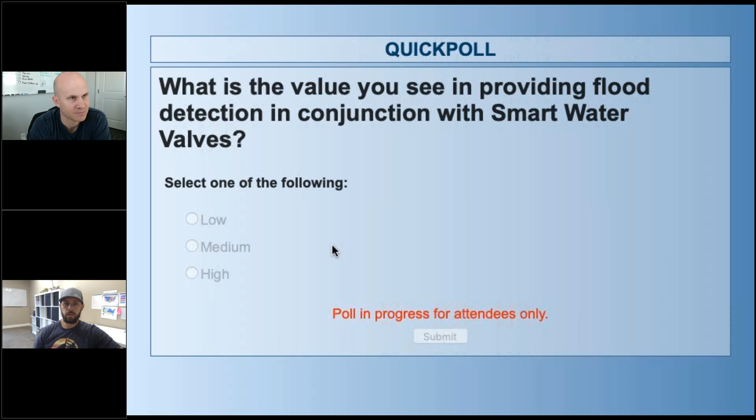Yeah, thank you, Neil, really appreciate it. Those were awesome polls, excited to see those numbers and get a little bit better insight into your business. So we are very excited today to talk about the new IQ water valve. This is a brand new product that's coming to market here this month. We'll talk a little bit about launch planning at the end of the webinar, but we wanted to give you a sneak peek into the product today, talk about what it is, how it's different, and then go through the installation process as well as some best practices. So we'll try to be quick. Again, today, these are really designed to be 20, maybe 30-minute webinars at most, kind of bite-size bits that you can take in and learn about the products without devoting too much of your day.

So with that, we're going to jump right into the IQ water valve. So what is it? It's quite a bit different than a lot of the water valves you may be used to in the market today.

A lot of the water valves that you see out there today require a plumber, and they're very expensive. That's been cost prohibitive, right? They're $300, $400, sometimes even $500 for the valve. You have to cut the pipe to install it and hire a plumber to do that.

That's another several hundred up to $500. And so I would say the typical smart water valve install in our market today has been right around the $1,000 mark, and that's been a real barrier to entry into the smart water market. So one of the things we've tried to do specifically with this product is to bring that barrier down. We want to drive up the adoption and the ease of install and lower the cost here. And I think we've done that. So we're very excited about it.

So this is retrofit, no plumber needed. It literally installs in 2 minutes, maybe less. You're gonna get to see that here in a little bit. We'll actually install one here on a pipe. It's retrofit, designed to fit quarter turn ball valves. So that's anything, if you can see my camera, anything like this, just a simple quarter turn valve, which is the majority of the valves on the market today, be it newer homes or even some older homes as well. It doesn't work on gate valves. So if it's really old, it's got the actual spinner gate valve, kind of like a hose bib or something like that, that's not going to work. But a lot of different types of ball valves, different sizes, are going to work with this product. We're going to show you that today on a couple different pipes and products, different types of valves.

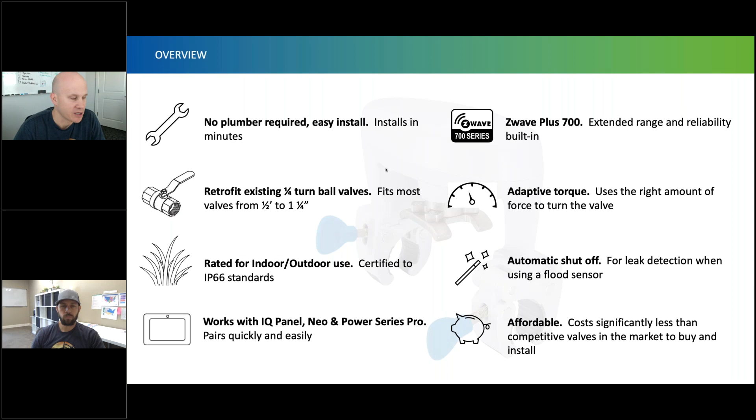It's just about knowing your customer, knowing that house—are you going to need a little bit more range? If it's a smaller home, then you probably just get away with the S-Line. If it's a larger home, if you're getting into maybe even some commercial situations where you did want to install this, or a bigger warehouse, barn, or outbuildings, you'd want to use that Power G one for sure.

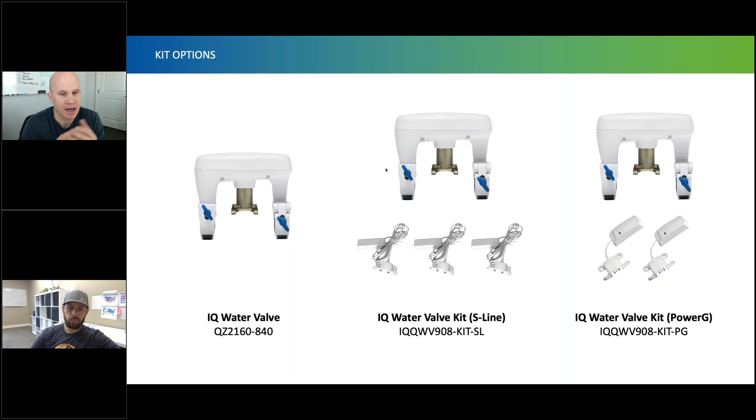I appreciate that, Mark. And the other thing I'll say about these kit prices is we're highly incenting the kit price here. So the difference between the standalone water valve and the kit price is really aggressive. You'll find the net cost of these flood sensors ends up being really attractive versus buying them a la carte. That's because we really want to incentivize the use of a flood sensor so you build that value, get that extra value in the automation where they're paired together, and get some of that automation beyond just a smart on-off valve. So we're excited about being able to offer those at the same price.

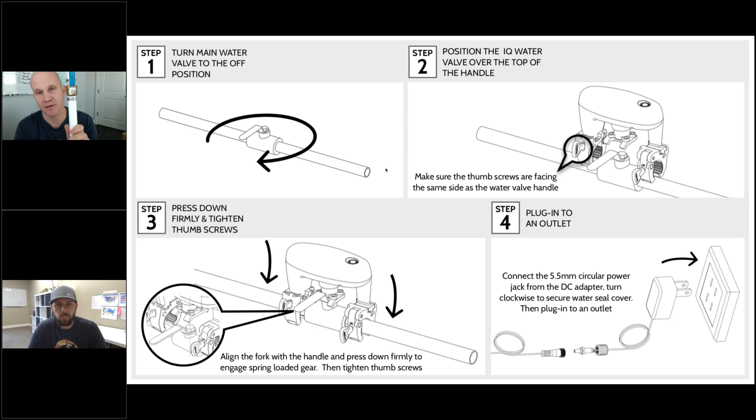The very first thing you're going to do is super easy. You're just going to go ahead and turn the valve. You want to install this when it's in the off position. The second thing is you're going to open up your thumb screws a little bit here, and you're going to install this directly over the valve with the thumb screws pointing the same direction as the valve. So you don't want it like this, that'd be backwards. You want the actual thumb screws pointing the same direction as the valve.

Now, when you push this onto the pipe, you can see this metal fork, we call it, has some adjustability, and inside here it's got gears that catch on the gears. So you want to make sure when you install this, you push it all the way in to where it catches on the gear. I've got a little spacer that we're including. If it's a really low profile valve, this one's kind of right on the edge. If it's a lower profile valve, you'll be able to put this spacer on the handle and go ahead, and when you push this down, that helps make sure the fork is engaged on low profile valves. So all you do is put it on.

Tighten your thumb screws here. Hopefully you guys can see that. And it's now mounted to the valve, ready to go. So that's step 1, 2, 3: turn off, stick it on, tighten your thumb screws.

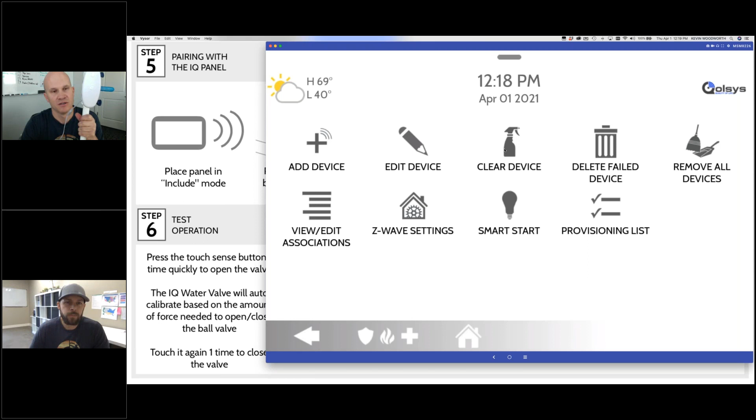Normally, being a Z-Wave device, I would clear it first. In this case, I've already done that in prep for this call. So I'm just going to go straight to add device, and I'm going to touch include on the panel. Now on the device, you just press this touch sense button 3 times. And there we see it shows up. It's S2 authenticated here, so let's go ahead and touch OK.

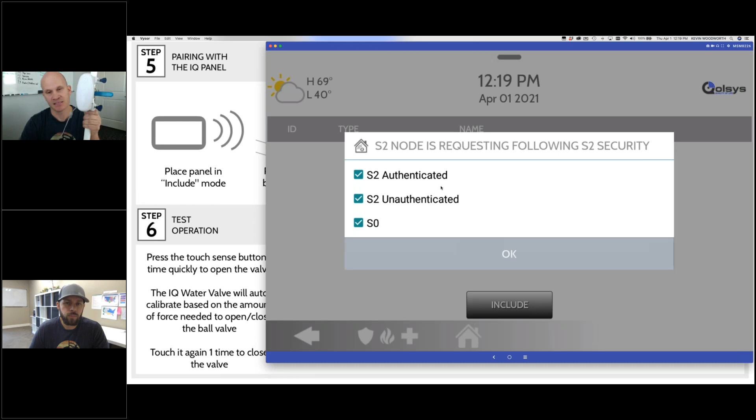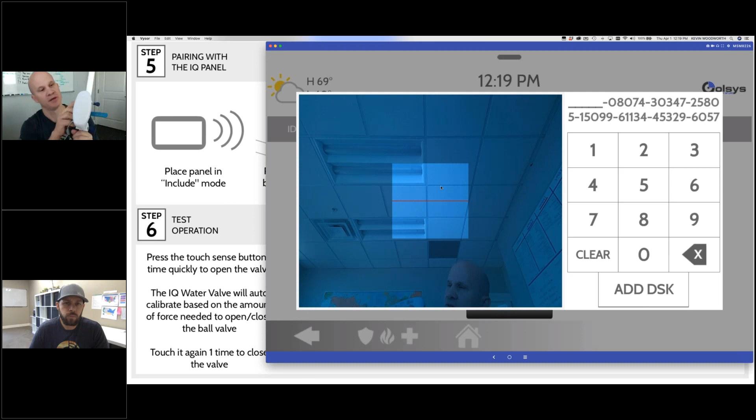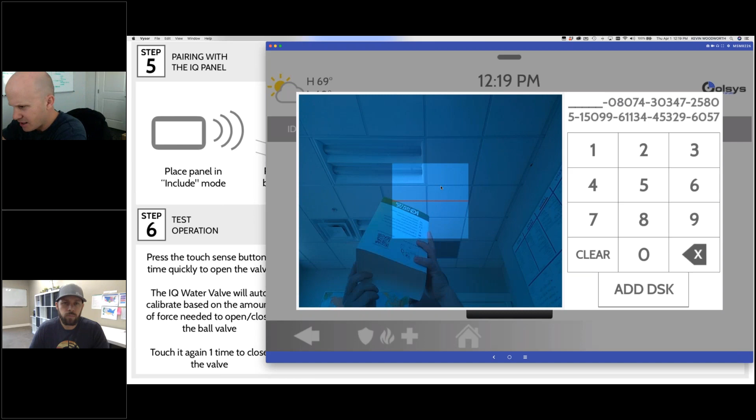And it's going to ask us for the DSK. Now, you can do this one of two ways. You can actually scan the QR code on the side of the water valve. It's a little bit small for the camera to read. You could take a picture of it and blow it up. We also list the DSK on the side here. Or you can take the sleeve of the box and scan the DSK there. So let's go ahead and do that directly into the panel.

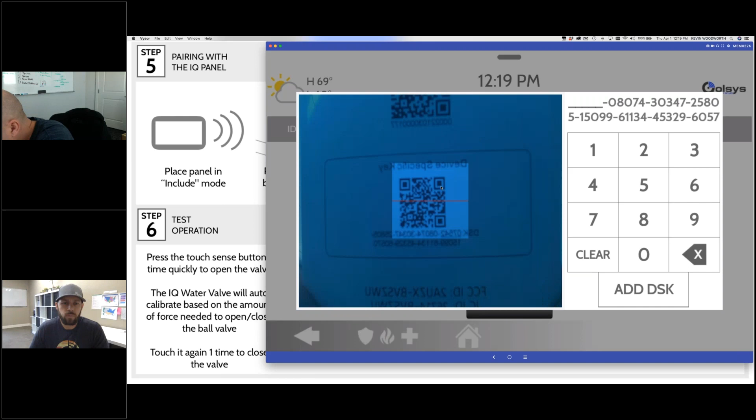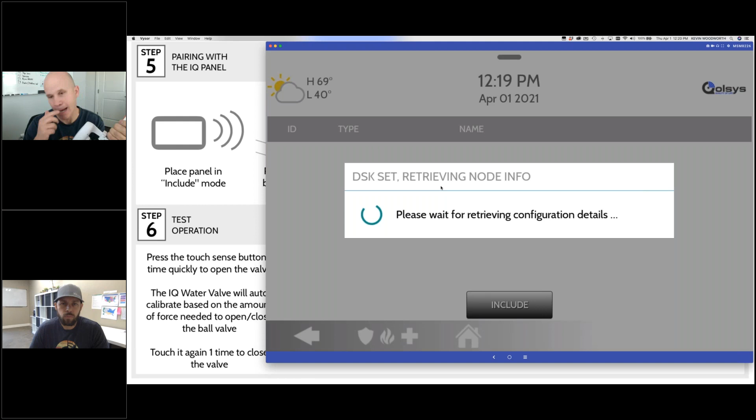If I can get this right here, should work. All right, there it took it. So again, you can either manually type in those 5 digits, which in this case would have been 07542, or you can actually scan the DSK, and it will know it's a water valve.

And we'll touch add. All right, so now that we've added that to the panel, the next thing you want to do is just test the valve.

So to do that, we're going to test the valve from the valve first. And when we test it, it's going to automatically choose how much torque to use. So I'll just press the button one time. And here you'll see it's kind of figuring out how much torque to use. There it ramps up its torque a little bit. All right, so there, that's now calibrated to the valve.

If I press it again, it'll close the valve. All right, and we are done with the install.

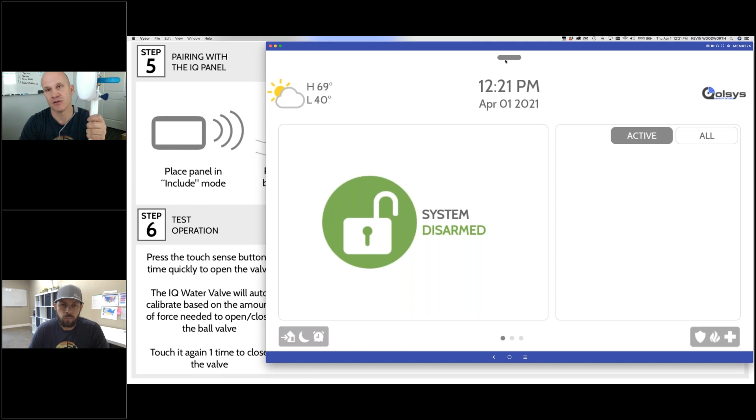Now, if I want, I can go here on the panel. We don't populate a UI page for this because this isn't a device you're going to control very often from the panel. We don't give it what we call an end user page necessarily, a front facing UI page. We kind of hide the UI a little bit.

But if you do want to control it from the panel, you can. You go to settings and go right here to other Z-Wave devices, and here it will show up as the water valve. And I can go ahead and test it directly from the panel as well.

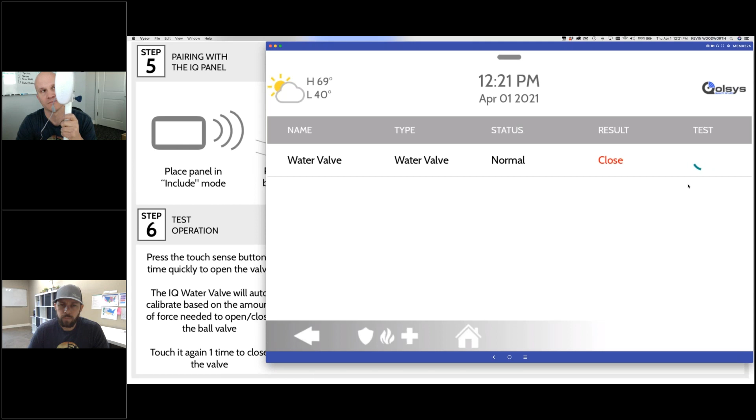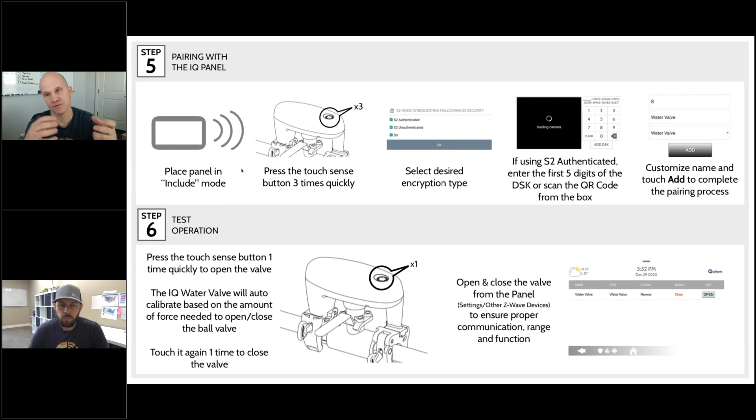All right guys, that's it for installation. Really simple, right? So 6 easy steps. Step 1, close the valve. Step 2, place it over the valve—I bumped it with my elbow so it's turning off again. Step 3, tighten your thumb screws, plug it in, learn it, and test it. Really, really easy.

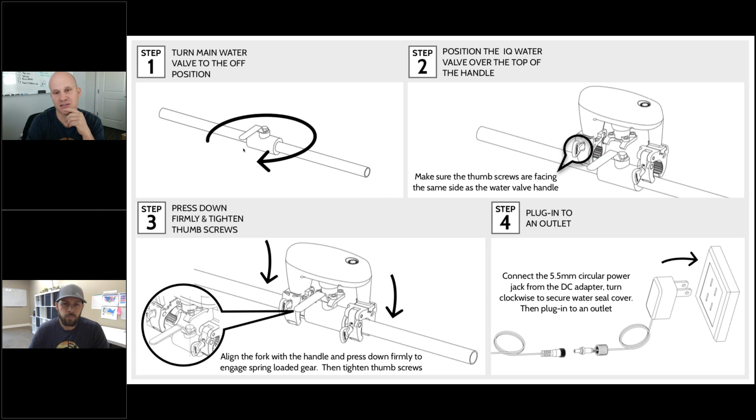I want to show you a couple other things we're working on. We're working on a brand new foot design, which is really cool. This is our new fork, and the foot that we're shipping with for soft launch right now in April fits a really broad range of these different types of valves.

The new foot that we'll be coming out with in May for the full launch clicks over the valve and is designed to better fit really wide valves and really shallow valves. It also can account for what we call NIBCO valves, which have a large brass protrusion—this foot is designed to fit around that brass protrusion.

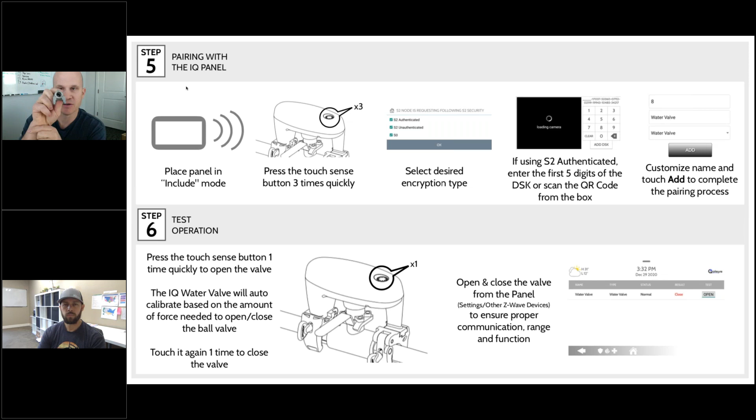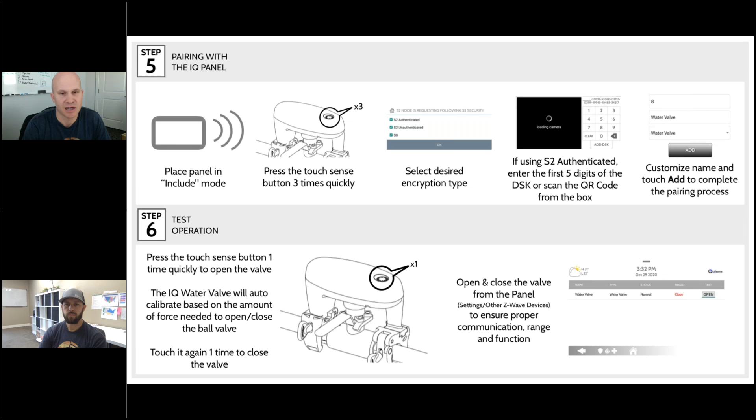We have spring-loaded collars inside, different size collars, that account for all the different size nuts you'll find on top of these valves. It's a really cool design that's really flexible and fits lots of different kinds of valves. With that, Mark, I'll pass it over to you.

Mark, you're on mute, but we'll ask a question while you find your mute button. One of the questions from the outside world is, once installed and paired, is there some way to lock out the device so that neighbors aren't messing around or kids pranking you?

See if I can remember how to do that. It's in the installation manual. I think I hold it down for 5 clicks and then 5 touches. Let's try it out here.

Oh no, that's a recalibration. I'll have to look it up, but it's a number of clicks. This is auto recalibrating it—if the calibration gets messed up, you can force recalibrate it, which is what it's doing now. But there is a way to turn that touch sense button off. It's in the install manual, I just can't remember it off the top of my head.